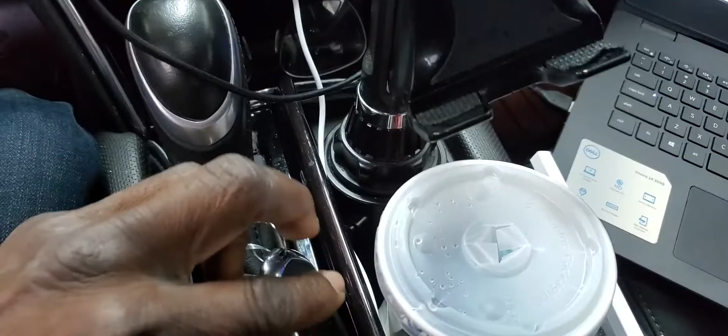Okay, this is a beautiful car. It's wireless - as long as the key is inside, the car will start. Connects with Bobby's guest, yes, the password is repair shop, R-E-P-A, I put the password in.

I came here last time, tried to program this car, but what happened is I was not able to program it because there was no communication with the cluster. I don't know the history of the car, but I told him, look, maybe this car has something different or there is something there, but I cannot communicate with the cluster.

So they took it to the dealer. The dealer gave them an estimate of almost $5,000 to fix the car - they said everything in the back, in the trunk, has to be replaced.

Suspension module - but the real reason, where did the short come from? The car was hit in the corner light, and under the corner light there's an LED module that had water inside, creating a communication problem. That's where the dealer said, you know what, I need to change all this stuff.

They come back, they check it out, they found the problem, and case closed. The estimate from the dealership saying 5,000 is here.

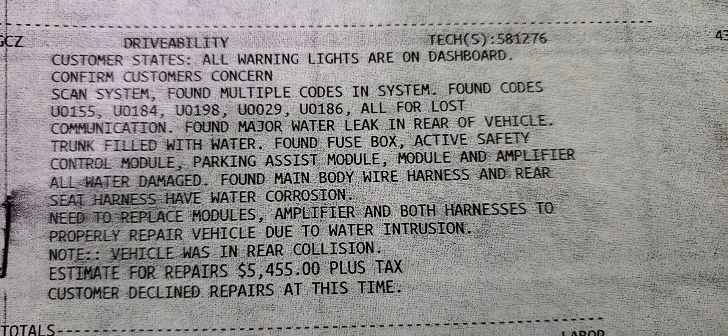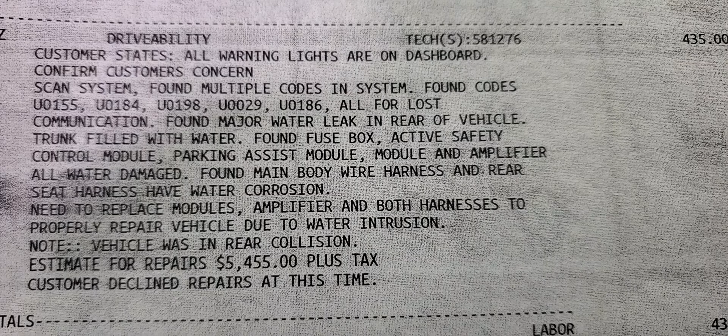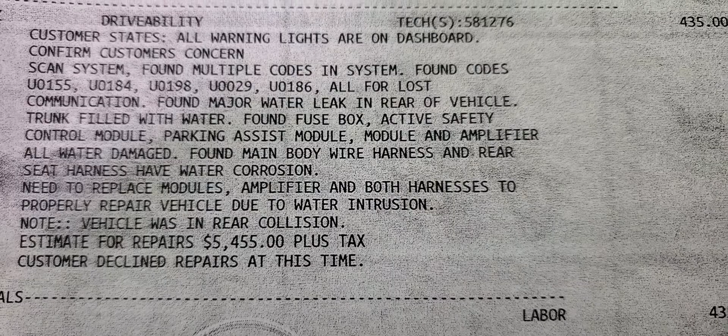You see that? All warning lights are on, dashboard, confirming the customer's concern. The scan system found multiple codes - communication found major water leak in the rear of the vehicle, trunk filled with water, found fuse box, active safety control module, parking assist module, amplifier, all water damaged.

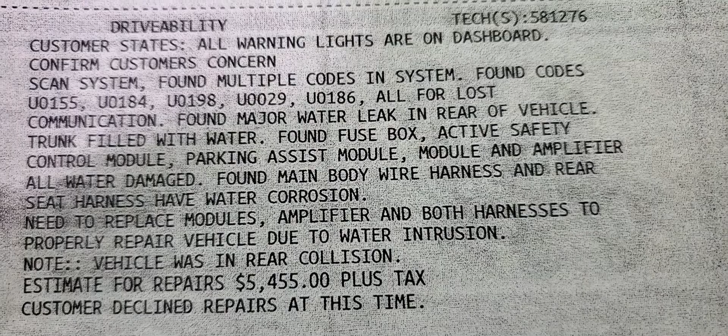Found the main body wire harness and rear. Anyhow, the estimate is $5,455. We found the problem was just water getting into the small corner left side light, the LED light module, and it cost $30 from eBay.

I'm sorry to say that, but sometimes if the customer doesn't know - come on guys, that's no good. However, this is a car, $30 fixed it. You want to be sure? Let us know, but this is what it is.

So they make you a good car and then charge you a lot of money. Please, anyone who is a mechanic or electrician, spend some time and understand the car, get the wiring diagram information, and fix your car. You cannot go crazy paying $5,000 - it doesn't make sense, it doesn't make sense.

Now I want to go program this car. Let me see what's going to happen. Let me log into ACDelco. This is how it is. Now you're going to log in, put your username and password here, and then we come back.

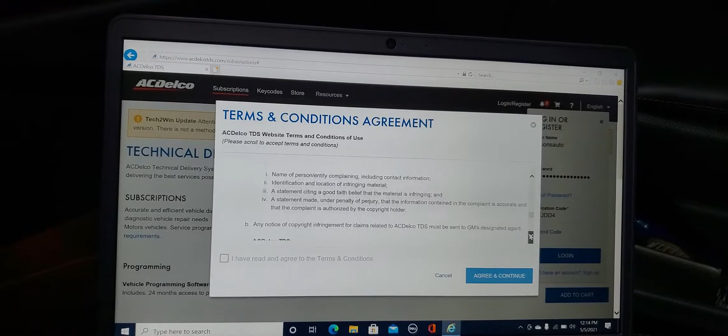Okay, now you are inside the verification. You have to scroll down to agree and continue, so go down all the way, read all the information, and then click yes, and then click continue here.

Now you go here, select no, okay, just go up to access, then you are going to SPS, start. You want to view the download, you don't want it, it's up to you. Run.

Beautiful car - the quality of these cars. So in a few minutes...

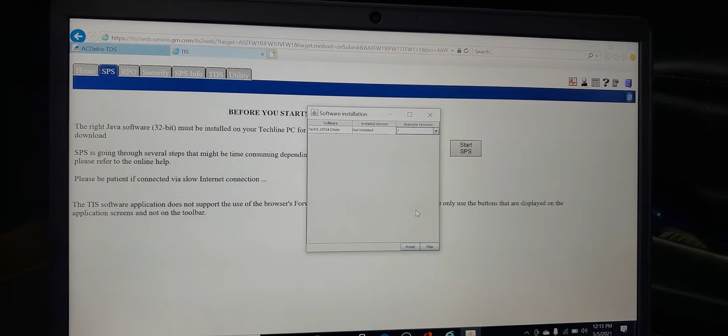Okay, do you need to update? No, I'm going to skip it. Okay, what do you want? Just go here, PC program, click next, next.

This is Cadillac, letter C, Cadillac, 2017.

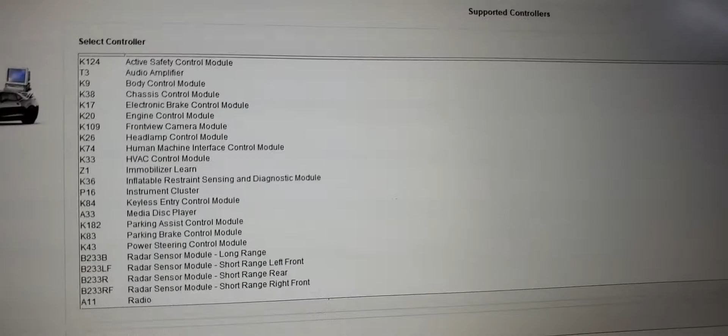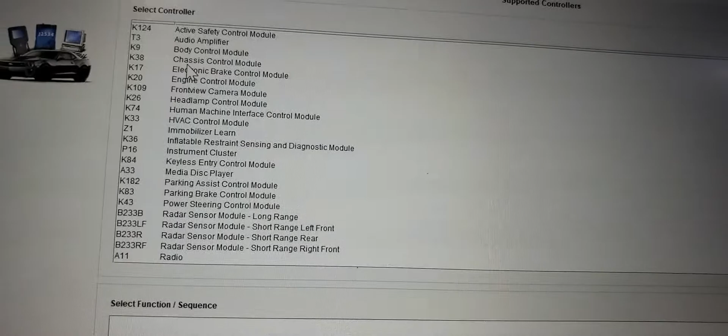Now here, what do you need to do now? Here are the things that you need to program. So you're going to go to instrument cluster - look at it, where it is: active safety audio, chassis, electronic brake, frontview camera, human immobilizer, instrument cluster here, P16. Double click or click here, next.

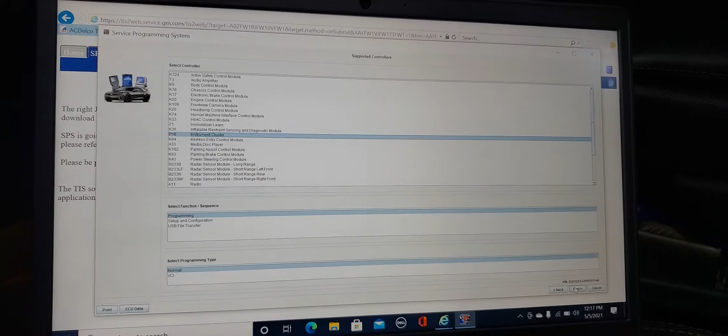So now we try to communicate with the cluster. System is good here - you see, everything is there now.

What I'm going to do is turn the key off, push the button, and wait for it a little. Don't push the brake. After 5 seconds, ignition is on. That's it, now you can see what is there to do. See, this is all what you need to do.

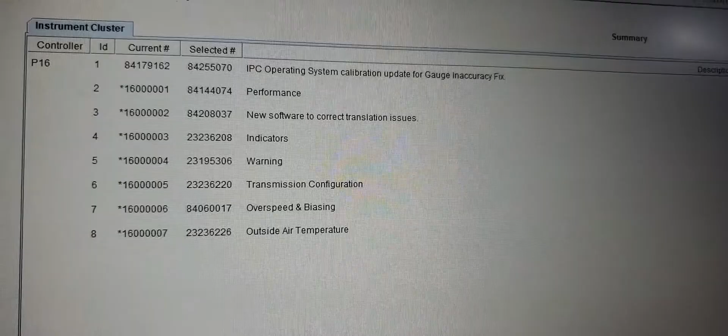We are downloading the software. Last time we were not able to program this car at all, and now we are good for it.

So be sure everything is good. The battery is good, your system is connected here. Then we come back.

Also, when you're working on the car, be sure you have good internet, and be sure you don't let the computer go to sleep. If your computer goes into sleep mode, you will be in trouble. So be careful of that.

Don't let the computer get into sleep mode. Thank you, then we take it from there. One time it does it, and when it goes to sleep mode, it will shut down everything. No internet, nothing, and that's no good.

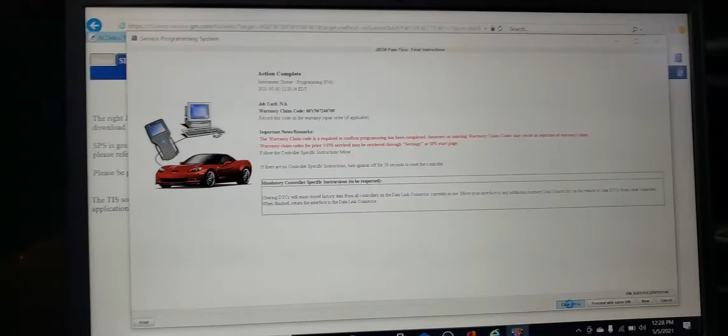Everything is perfect. I'm going to clear the code if there is any code. Any luck, brother? Yeah, I'm done.

I finished, I programmed it. Give me the code you have, where it is. Code? Which code are you saying? You have the code cluster, no programming. Oh, on the computer. Let me see.

Okay, where is the odometer? It's supposed to be right here. It's not showing anything there. It's supposed to show the mileage there, yeah, it's supposed to be the mileage. I don't see it.

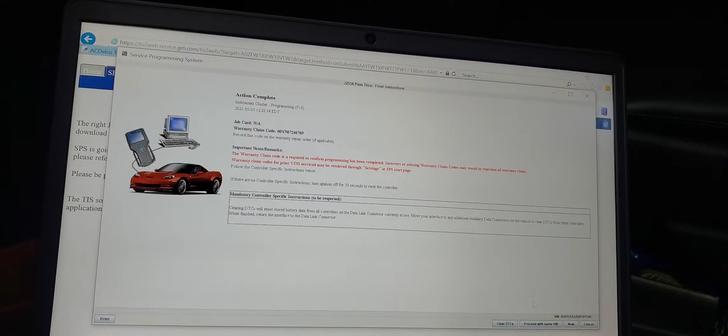Number, you see, it says right here. This is the code B101E. Yeah, it's not programmed, right?

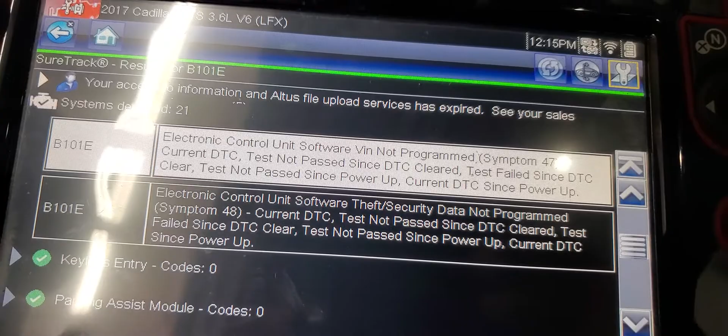Control, software, yeah, new software, theft security, and then VIN not programmed, data not programmed. Now I want to see what is to be done. I already programmed the cluster, already finished. I don't know what about.

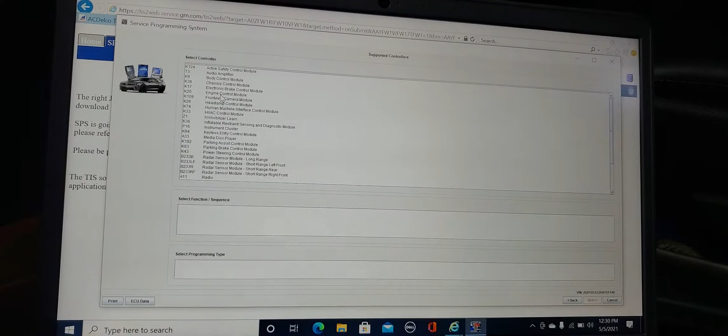Can we read the VIN number? I want to see now if there is anything, and I'm trying to see if there is anything, but there is nothing. Okay, I already programmed it. It's supposed to work. Let me turn the ignition off.

Yeah, you can read the VIN number for it now because I downloaded it with the VIN number. But I said, why is the mileage not coming on? Yeah, that's what I'm saying. Because the mileage also, I think you have to put it in. There's got to be something, but you shouldn't drive the car even one mile before you do that. You know that?

It doesn't give you an option to put the mileage. No, it's not here. Parking brake, keyless, instrument cluster. When you put instrument cluster, yeah, there is something here. Setup and configuration, USB file transfer.

Programming is done. Let me see now what they mean by setup and configuration, okay? We have another thing too. Let me see what you mean by setup. After I program it, I don't have this one before. Okay.

Controller, I have something here. P16, no data, X file. Instrument cluster setup and configuration. Let me see what it says. It does something here, I don't know what it is. Okay.

Please wait, establish vehicle communication. Oh, ignition has to be on. Turn the ignition off, remove key. Turn the ignition off, okay.

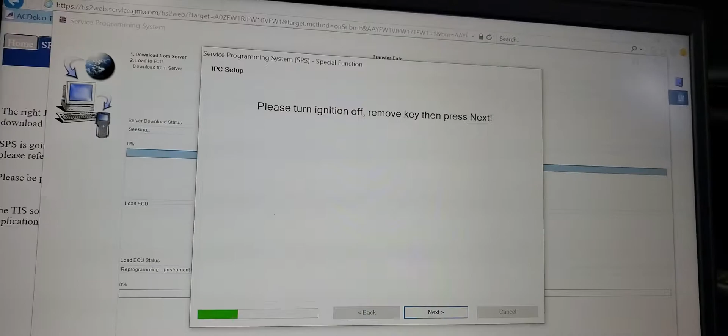Turn the ignition off and remove the key. Oh, ignition must be off. Okay, I did that. Please turn the ignition off and press next.

Push. So that means the cluster has three steps. Okay, now I'm going to go for one minute.

I don't know what that is for, but if you remember, one of my friends asked me if this is going to work. And if you see here, the mileage is not there already. I want to see what the configuration does.

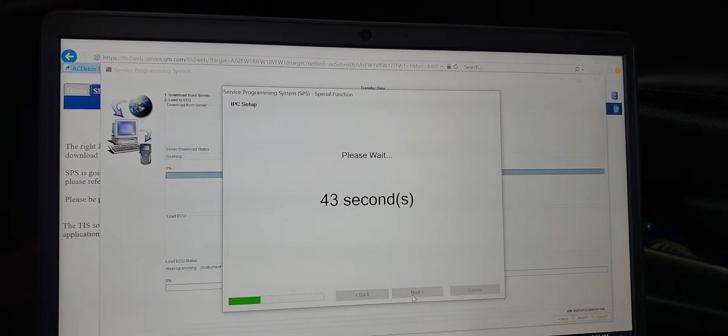And also they say USB file. I have to know what that USB file has to do, and where we can get the USB file from. If anything, I may have to call. Let me call right now to see if there's any support.

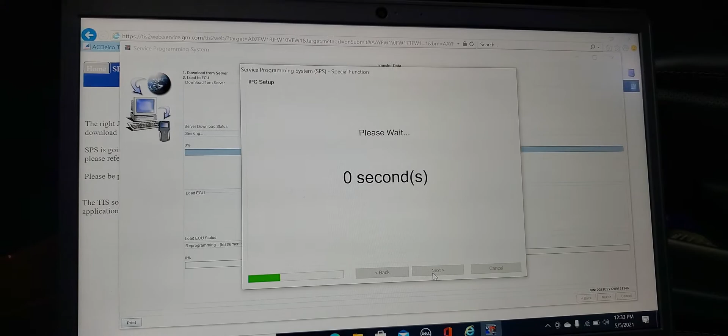Press finish. IPC setup, stop, communicate, please wait. Establish vehicle communication. IPC setup. Stop.

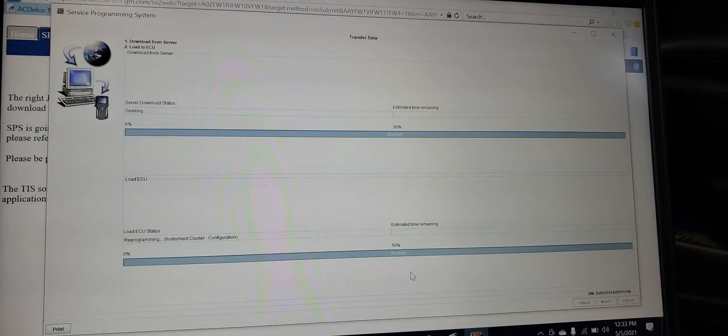So what I'm going to do is click finish. Put the mouse there, click finish. And now let me see what's going to happen. Am I going to get the mileage back?

Please wait, performing ECU configuration. Wow. I hear all these things going up and down.

Okay, instrument cluster setup. Instrument cluster configuration. Okay, everything passed. That's good.

That's good, so now what is next? This one also is done correctly. What's next?

Okay, let me try now. Turn the ignition off. Start it. I want to know what's going to happen.

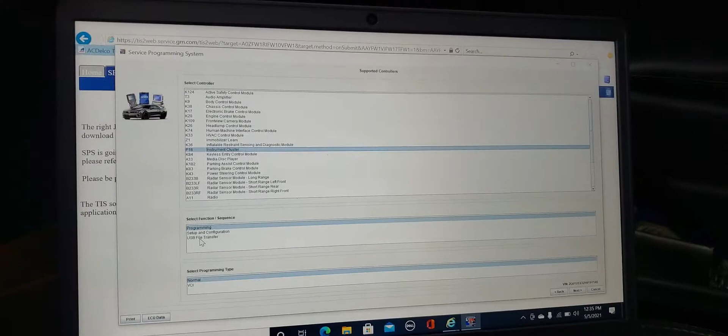I cannot see the vehicle odometer, it's not there. Let me see what they mean by that. I'm gonna go to the instrument cluster again. Okay, setup configuration, programming, USB file transfer. I don't know what that means. But let me call and see what the setup is for that, because still I don't have any RPM, no mileage.

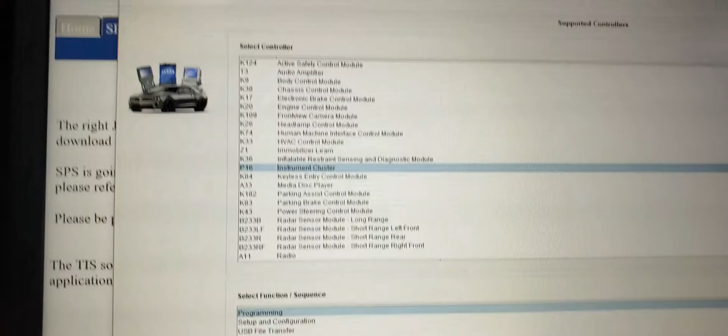Let me give you the model, or the VIN number is enough for the Cadillac. We have a brand new cluster, set it up, put it in, and when I went to test it gave me like 3 lines: programming, setup and configuration, USB file transfer.

I did the programming, success. I did the setup and configuration, success. But still I'm not seeing the mileage on the cluster. And I see USB file, what is that? I'm not sure. Or do I have to put the old one, then read the information and write it? I'm not sure. Okay, full VIN please. Okay, full VIN, sure.

2, G as in George, 6-1, U as in umbrella, 5, Sam, 3-2, Harry, 919, 1146. Yeah.

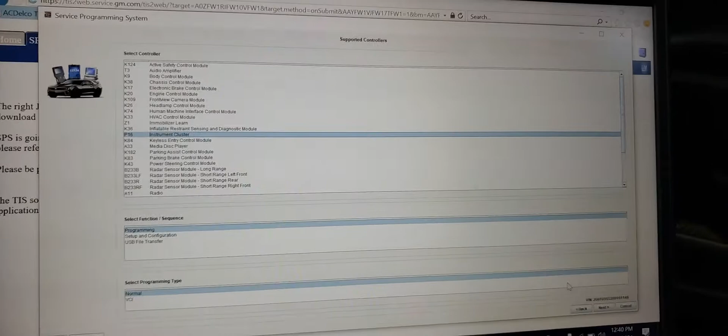This is a 2017 XTS. Yes, 2017.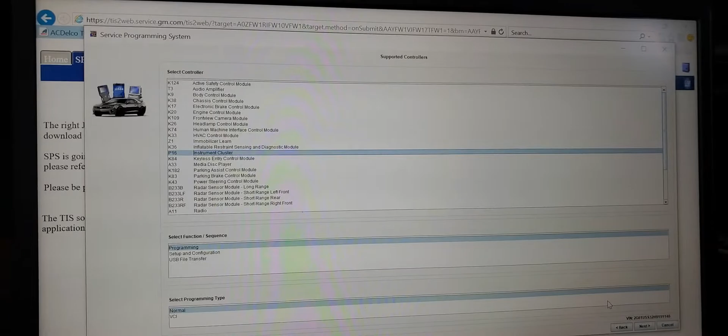And you have not yet done the USB file transfer? No, that's the only thing I don't know what it is, or where I'm gonna start from. I did the programming through the MDI2, it went through correctly, and I did the configuration, went through correctly. But when I see USB file transfer, that means I'm supposed to have a USB with some file where I can get this, or where I download it from.

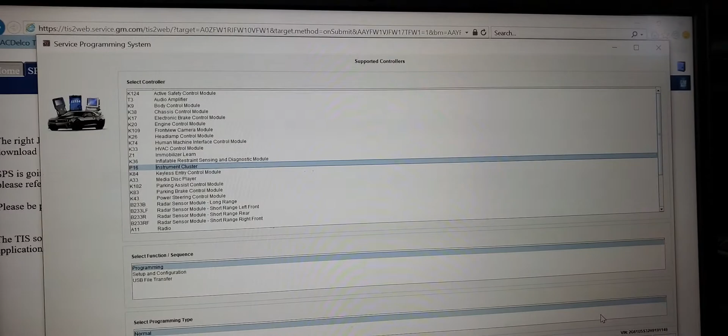Okay, so you need to have some sort of 4 or 8 gigabyte flash drive plugged into the computer. When you select the flash drive, it reformats the flash drive, and then downloads the files it needs. Once those files are downloaded, it ejects the flash drive, and then in the vehicle with the radio on, you plug the flash drive into the USB port, and you should be able to get an update screen and run the update from there.

Okay, and that update is for the cluster to get the mileage, or what is it? That should be for the display. The display on the cluster with the mileage, right? With the odometer, I believe so. Or is that for the second display, for the radio? This you plug it into the radio, but you don't necessarily—it's not an update for the radio. Oh, it goes to the instrument panel. Specifically, it's the instrument panel USB transfer.

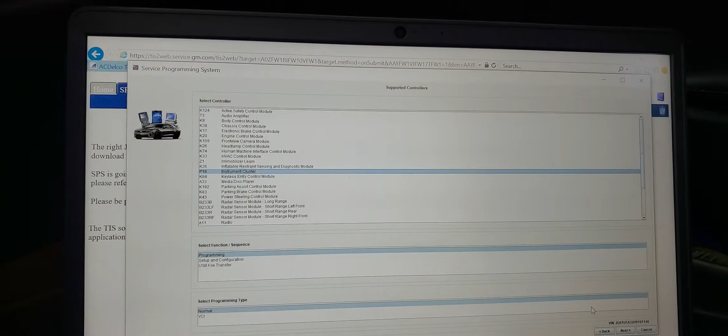Beautiful, so I'm gonna do that right now. I'm gonna buy the USB flash drive and download the software, and then I'll take it from there. Thank you for your help.

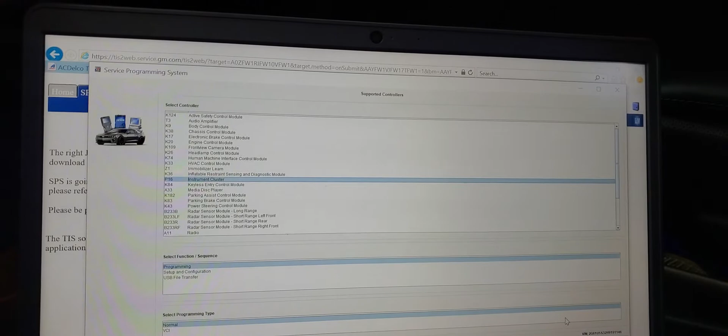No, if I download that one I know. If I finish, and I took the flash drive from the laptop, I have to hook it up into the radio. Do I have to go to settings or anything, or will the thing hook up completely by itself? It should pull up an interface showing an update available. You'll want to hit yes on that.

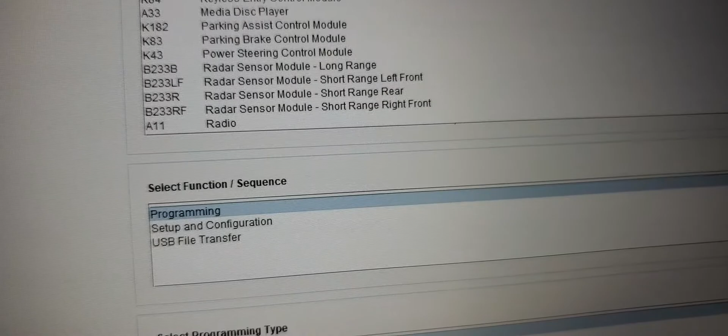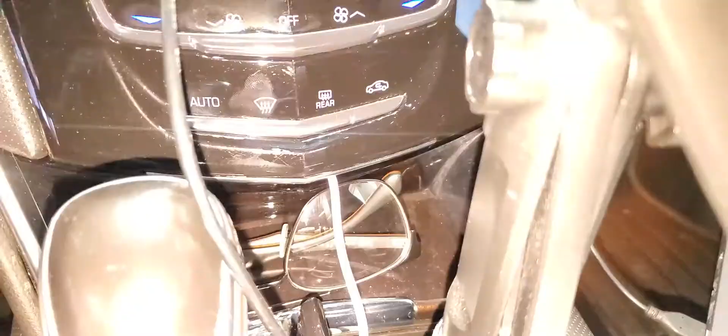So what it says is, in order for you, you have to get the USB flash drive, which is very good information. I gotta get the USB flash drive, put it here, transfer the file, and then look for the radio USB place—I don't know where it's located. The USB flash is supposed to be somewhere. I don't know where. I'm gonna get that one soon, and then hook up this one into the place where it says flash drive on the radio, and then it will take it from there.

So let me look for the flash drive. Coming back.

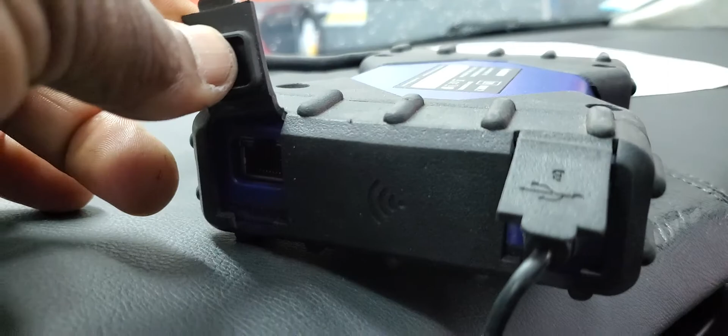Okay, now you put a USB here. This is to program the cluster, and then I want you to open me the radio place, because we have to. Okay, now I'm gonna go to transfer file here: USB copy by VCI. That means you can plug it in on this place here and the VCI will take it, or you can do a USB copy. So I'm gonna do USB copy, I'm gonna click here. That's very good information, click here.

Only for vehicle with RPO UDV, up-level cluster, or with RPO UDD, base cluster. Okay, now go to the other side, brother, open the other door. We need to get the right information. You see here, open the cluster, there is RPO there, I believe. Open the cluster—but is this the cluster, right? No, it's asking a different question.

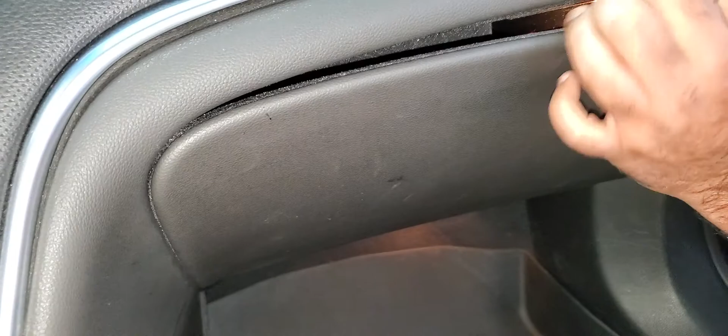You know, there is some kind of UDD configuration, a white piece in the cluster. If this is the cluster—I mean the glove compartment—if we can open it, they're supposed to have something like, you know, they're stuck there. They're supposed to have, because we can, a sticker there. Yeah, sticker there, sometimes on the tire, but I believe this one's supposed to be here.

Okay, I'm gonna download. We have to get that one because we have two software. I believe that thing is there, right? On that place they put it under the cluster. Sometimes they put it in the tire. You gonna get messed up though.

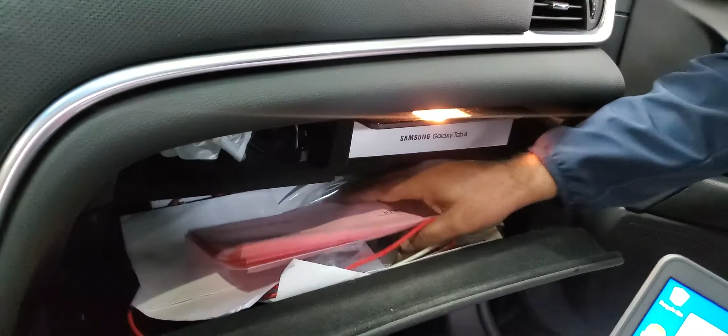Okay, I don't know, no I know. Can you sometimes close it? Can you close it? I like that one. You know, sometimes you push them and yeah, they open like this. You see here, yeah? Oh my goodness, these things that you need to know.

Oh, it's empty now. It's supposed to be a sticker here. Unless if they move it, but it's supposed to have a sticker on the floor here. Then they have the sticker in the trunk too. If it's not here, it's gonna be in the trunk. It's not here, right? So you gotta go in the trunk. Let's go back in the trunk.

It looked like somebody tried to do the same way we did. He messed up everything. Oh, that's the oil. Too much stuff on there. Let's go back in the trunk.

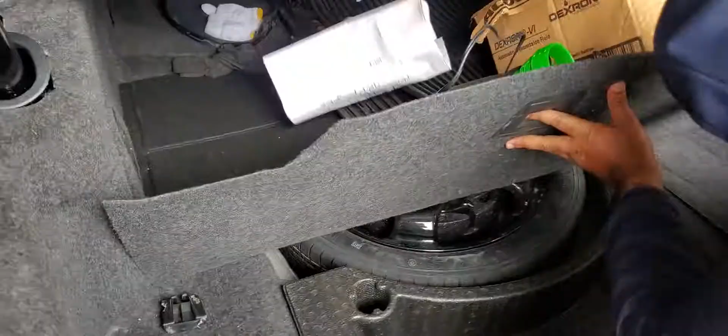They usually put a sticker. Oh, sometimes they put it in this piece here.

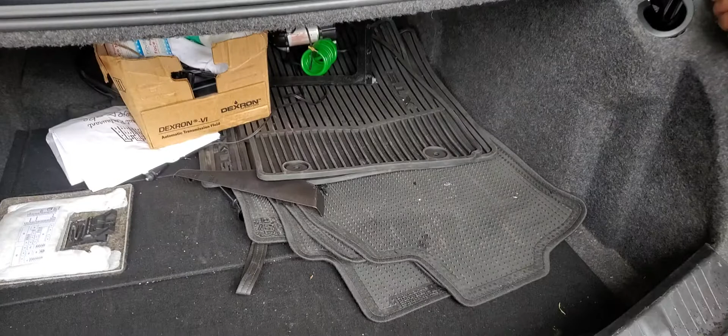But his question over there is for the instrument cluster. There are two options, either one with the full screen and overhead display, or the one which has like the. So show me this, which one you think?

If you go in, we have two, okay it says only for vehicle with RPO UDV up level cluster. What it says is whether one is only with the vehicle with RPO UDV up level cluster, with RPO UDD base cluster. What is the base cluster? Write down what is the base cluster and up level cluster on this car. We need to know if this car is up level cluster or base cluster.

If I know, I will just go ahead. And also, where is the USB connector here on this car? Okay, USB, where? USB connector is here, right? Because we need to put the USB after we finish. We have to put the USB here. Even the customer also has a USB, but I'm not gonna use his. I don't know what crap he has inside.

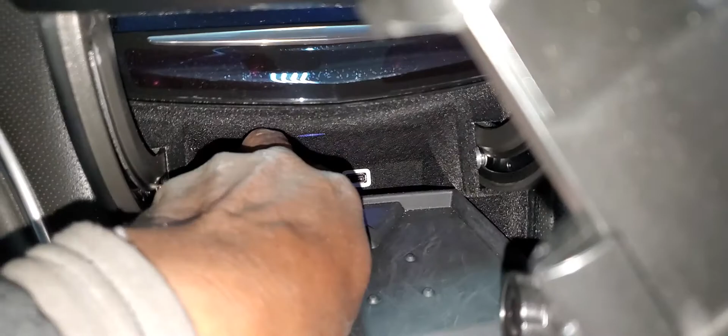Okay. I see something here, maybe this is a deal. But I'm gonna put this one there. And I will wait for that one. When we have the information, I will click next.

Uh-oh. We need to check which one we need to do. So that's the next step.

The up level is everything, there are no needles, everything is computerized. This one here, the base one, is only small. The navigation screen is supposed to be like big. And whatever you control here, you can control it by using those buttons. You see, so this is the basic, and the other one is full.

So I'm gonna go here and use the base one. I'm gonna use the base one. Okay, I'm gonna go next. That's the software I needed.